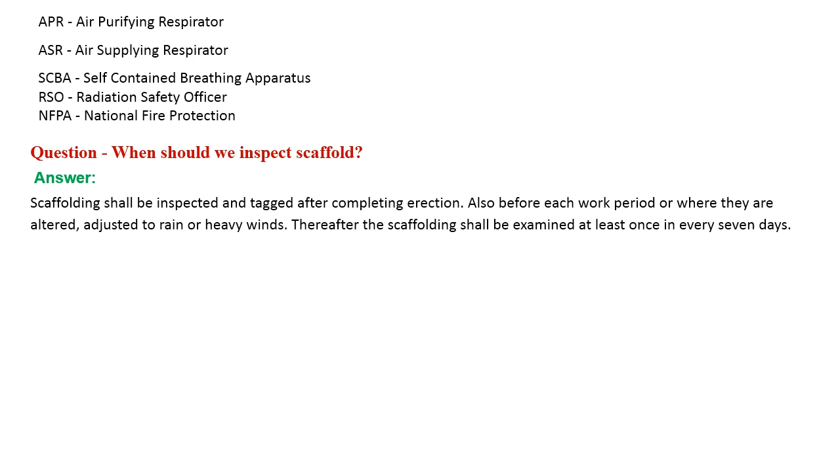When should we inspect scaffold? Scaffolding shall be inspected and tagged after completing erection, also before each work period, or where they are altered, adjusted to rain or heavy winds. Thereafter, the scaffolding shall be examined at least once in every 7 days.

What is the angle to fix the ladder? The angle is 75 degree, or 1 by 4.

What is lifeline? Lifeline is a component that consists of a flexible line that connects to an anchorage at one end and hangs vertically, or that connects to anchorage at both ends to stretch horizontally, and which serves as a method to connect components of a personal fall arrest system to the anchorage.

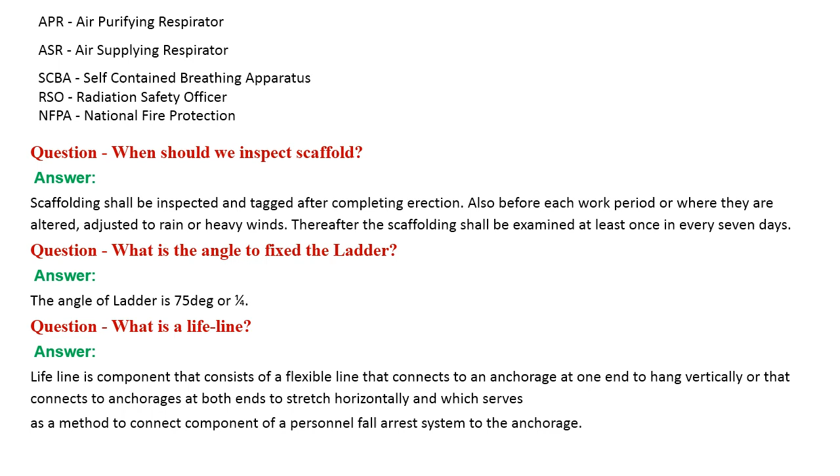What is emergency evacuation plan? A procedure to provide concise guidelines for evacuation in case of emergencies and to identify the emergencies in advance. This also helps us to plan and define roles and responsibilities of all building custodians, fire wardens and occupants.

What is the importance of toolbox meeting? The workers can be educated about safe working rules and procedures, and their awareness can be improved on some tasks.

What is a hydro test? It is the test carried out for leak testing of pipes, equipments, etc., by filling water in these equipments and pipes with some pressure, and its joints and connections are checked for any leaks or breakage.

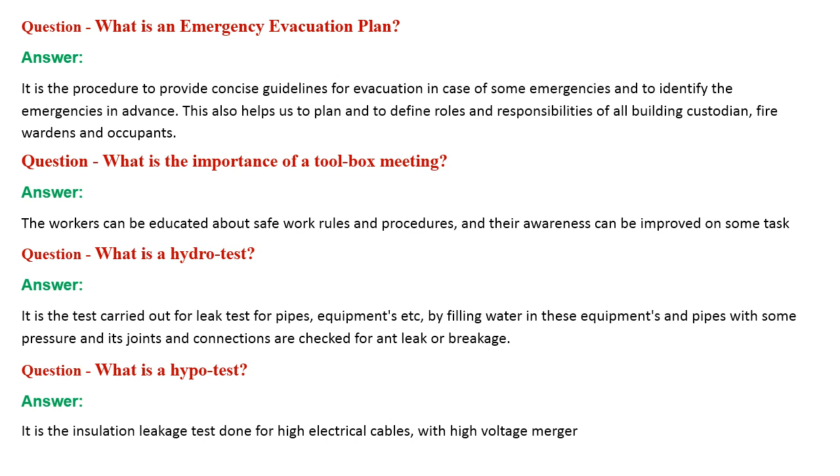What is hypo test? It is the insulation leakage test done for high voltage electrical cables with a high voltage megger.

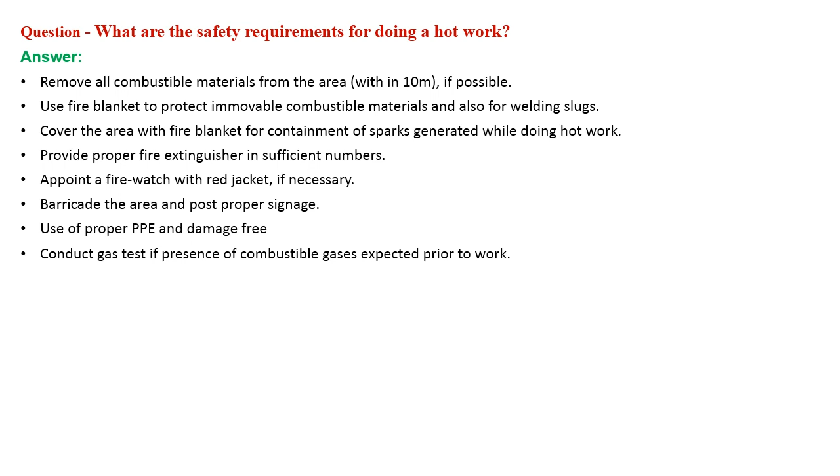What are the safety requirements for doing hot work? Remove all combustible material from the area within 10 meters if possible. Use a fire blanket to protect immovable combustible materials and also for welding slugs. Cover the area with fire blanket for containment of sparks generated while doing hot work. Provide proper fire extinguishers in sufficient numbers. Appoint a fire watch with red jacket if necessary. Barricade the area and post proper signages. Use proper PPEs, damage free. Conduct gas test if presence of combustible gas is expected prior to work.

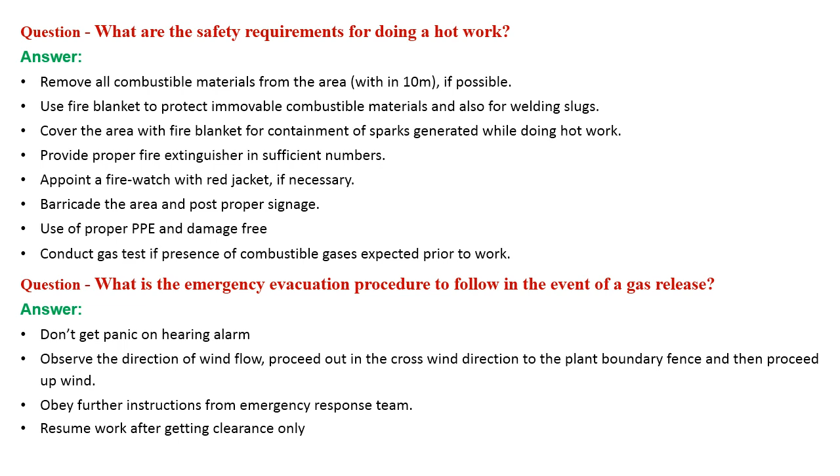What is the emergency evacuation procedure to follow in the event of a gas release? Don't get panic on hearing the alarm. Observe the direction of wind flow. Proceed out in the crosswind direction to the plant boundary fence and then proceed upwind. Obey further instructions from the emergency response team. Resume work after getting clearance only.

What are the benefits of near miss reporting? Near miss reporting helps to make analysis of the incident in order to avoid reoccurrence, to rectify the cause of those near misses before they turn into accidents, to identify the deficiencies of site safety programs or performance, and to find remedial actions to improve safety performance by reducing LTA, accidents and near misses.

What is an assembly or muster point? The area determined and marked for assembly of people working in the area in case of any emergency is called muster point. What is meant by head counting?

On hearing the emergency alarm, all people have to assemble at the assembly muster point. There, our supervisor will call his workers with the attendance sheet and confirm that nobody is trapped in the site. This procedure is called head counting. Its purpose is to ensure all workers are present in the assembly area, they are safely evacuated, and to identify the person if anybody is trapped and take necessary actions to rescue these trapped workers.

Explain me safety precautions for scaffold. Wooden board must not be painted. Cracked wooden boards should not be used. Check for rust in pipes and clamps. Clamps should be fixed and should be in good quality. Board thickness should be 3.4 cms with no bending. The construction must be rigid and properly based. Use good and sound materials. The wooden bellies should have no joints.

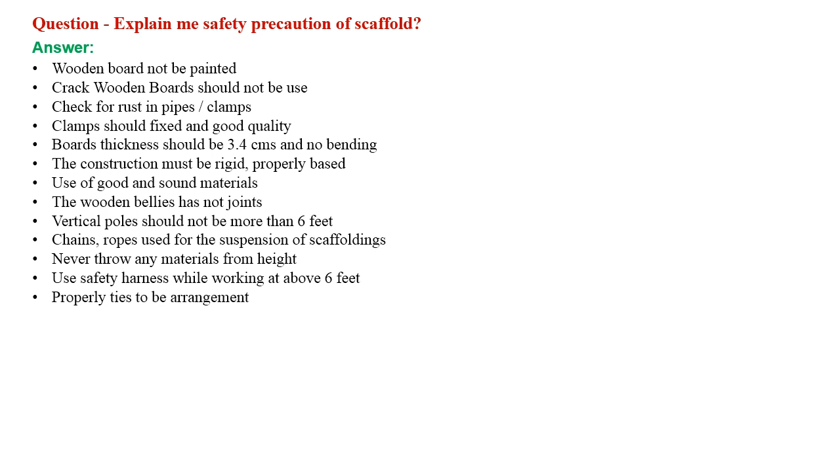Vertical poles should not be more than 6 feet. Chain ropes are used for the suspension of scaffolding. Never throw any material from height. Use safety harness while working above 6 feet. Properly ties to be arranged.

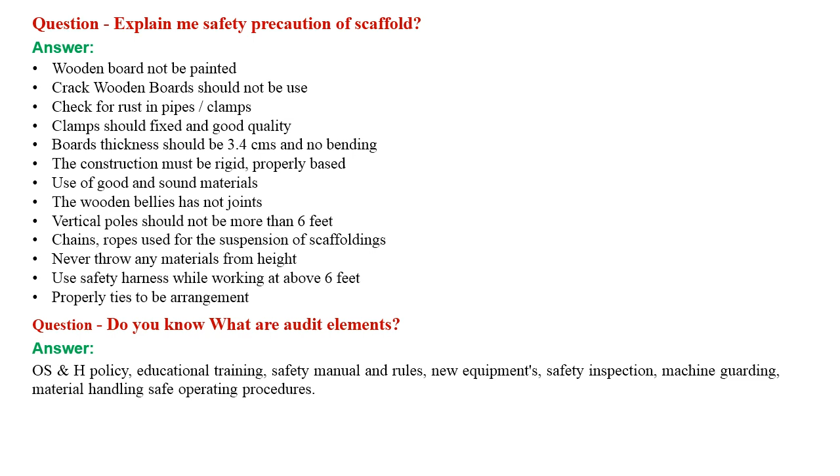Do you know what are the audit elements? OS and H policy, educational training, safety manual, rules, new equipments, safety inspections, machine guarding, material handling, safe operating procedures.

What is heat stroke? What are the different stages through which a person undergoes before he gets heat stroke? During hot days, due to dehydration, body temperature increases beyond safe limit because of breakdown of the body's heat regulating mechanism. Due to this, the person collapses, and if not taken care of, he can even die. This is called heat stroke. Generally, pulse raises 10 beats per minute for each 1 degree Celsius rise in temperature.

Heat cramps: exercising in hot weather can lead to muscle cramps because of brief imbalances in body salt. Heat exhaustion: further losing of fluid and salt can lead to dizziness and weakness, and body temperature may rise up to 102 degrees Fahrenheit. Heat stroke: in some cases, extreme heat can upset the body's thermostat, causing body temperature to rise to 105 degrees Fahrenheit or higher. Symptoms are lethargy, confusion, and unconsciousness.

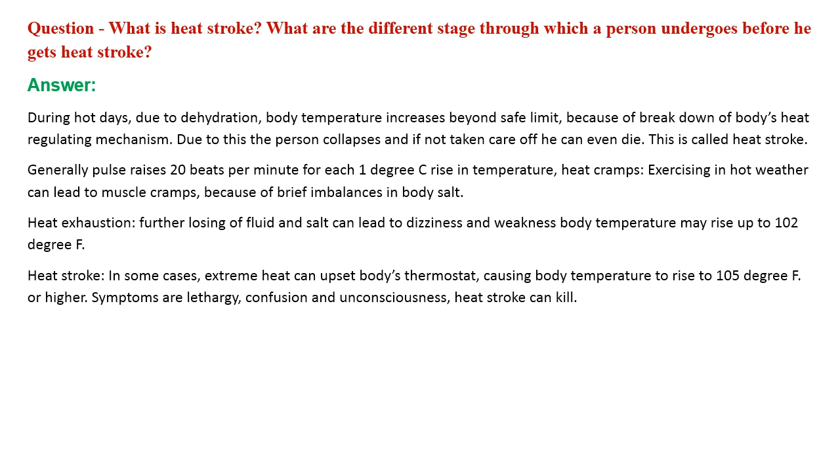Heat stroke can kill. In what circumstances does a fall protection system have to be used? If a person could fall more than 1.8 meters, then a fall protection system should be used. Example: any activity at an elevation of more than 1.8 meters such as erection, dismantling or maintenance of scaffolding, pipes, equipments, etc.

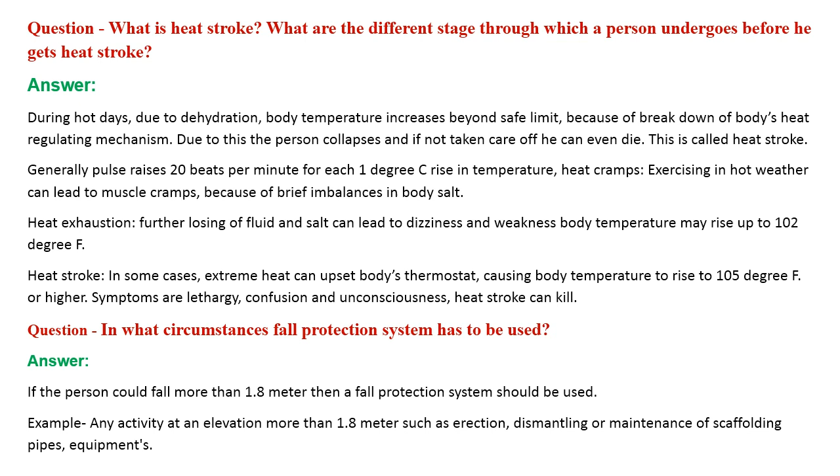Do you know what is the Factory Act? Factory Act is a social enactment to achieve social reforms and is given a liberal construction to achieve legislative intent.

Explain how many types of signboard: mandatory, information, fire and explosion, caution, wiring.

Explain me what is safety audit, and on what three bases does it operate? A safety audit is a workplace screening process that indicates any unsafe working condition and recommends corrective measures. It operates on measurement, analysis and testing.

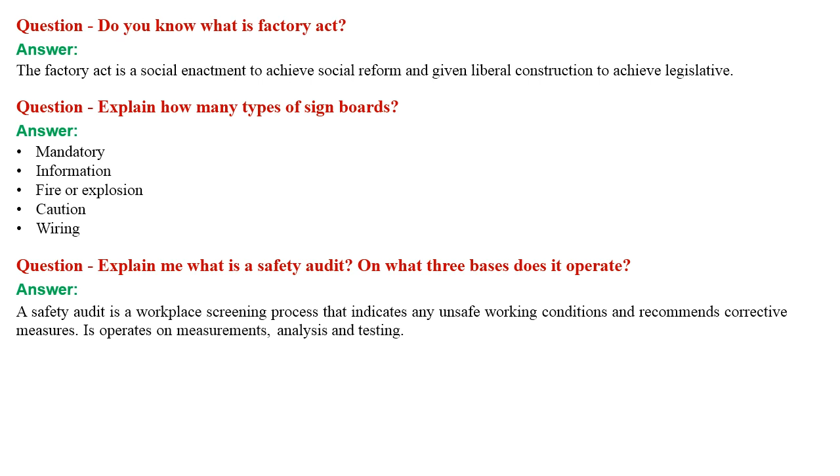Explain me: training or experience, what is more important in a safety officer's role? This is a very important question. One without the other is not potent enough for many situations, so I would consider both very important. Training is a very prerequisite, and experience comes with time. They cannot be compared or used interchangeably.

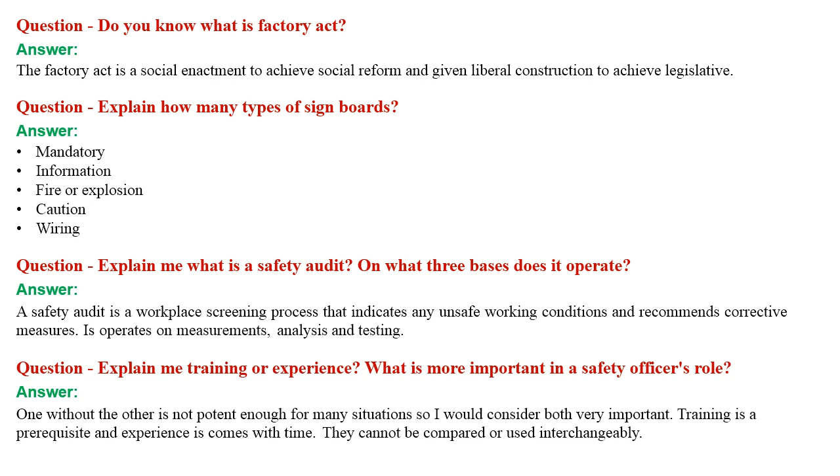Explain role of management in industrial safety. A written safety policy should be issued by management towards men, material and machines. The safety policy should bring out the management's attitude towards men, material, machine. The safety policy should be circulated to top, middle and workers. Management meetings should be in position. Management should arrange for safety inspection once in 3 months and safety audit once in a year to be carried out.

What is industrial hygiene? Industrial hygiene is defined as the art and science of preservation and improvement of the health and comfort of the workers.

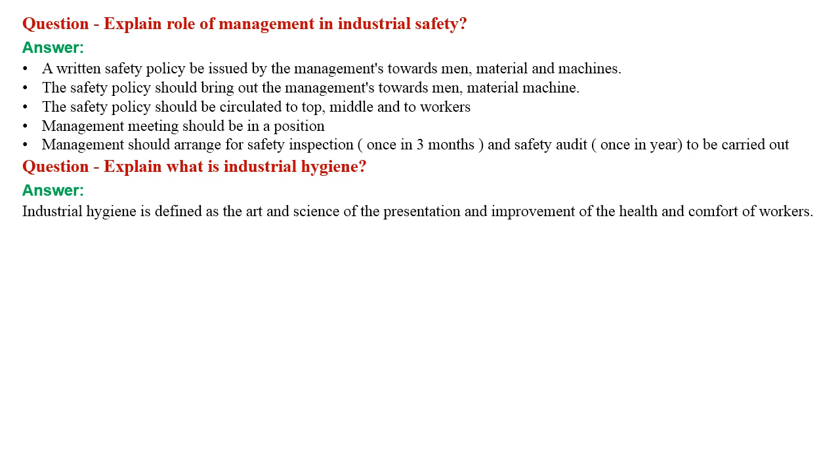Explain and differentiate between risk assessment and incident investigation. Risk assessment is conducted before an accident or incident has occurred, with the aim of avoiding any incident in the first place, while incident investigation is done after an accident has occurred to determine its causes and avoid its repetition in future.

Tell me, what are the causes of accidents with hand tools? Due to wrong way of using tools, due to defective condition of tools, due to failure of using the right tools for the right job, due to wrong way of carrying tools, due to storage of tools unsafely.

Do you know what are the precautions for gas cutting? A fire extinguisher must be available nearby. Fire watch must be available nearby. Remove all combustibles from the work area. Use all necessary PPEs. Never put welding gas cylinders inside a confined space.

Hoses shall not be laid in pathways. Gas cutting torch should have flashback arresters. Gas test to be done to check for presence of flammable gas inside. Good housekeeping and ventilation are necessary in the working area.

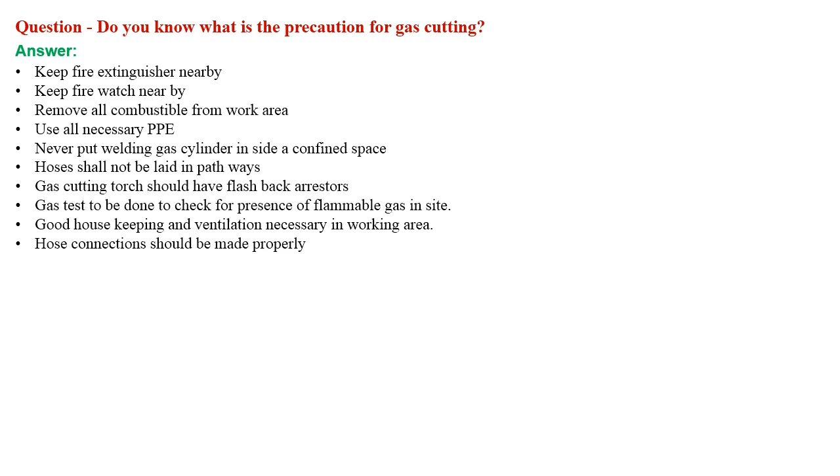Explain safety rules in using compressed air. Only authorized persons should use compressed air. The body or clothes should not be cleaned with compressed air. Compressed air hose pipes should not be placed across passageways. Leakage of compressed air should not be tested with hands. While working with tools run by compressed air, safety shoes are to be used. The tools should not be kept in position when not in use.

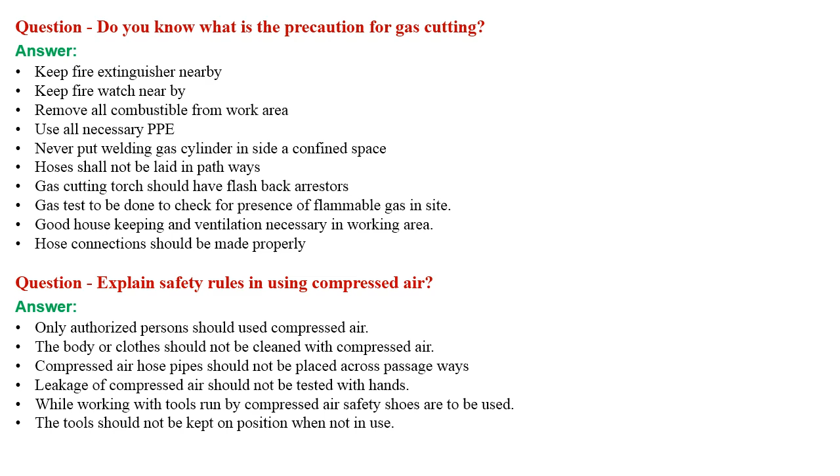Do you know the precautions for excavation? Excavation areas should be suitably barricaded. Signboards, lights, and flags should be available. Avoid heavy vehicles coming near to the sites. PPE like helmet and safety shoes should be used.

Keep the excavated soil at least 5 feet away from the excavated area. The excavated site should be sloped back to a safe angle. Hand excavation should be done in the presence of underground pipes or cable places. Cutting shall be done from top to bottom. All narrow trenches 4 feet or more deep shall be supplied with at least one ladder. While excavating on a slope whose height is over 10 feet, men should use safety belts.

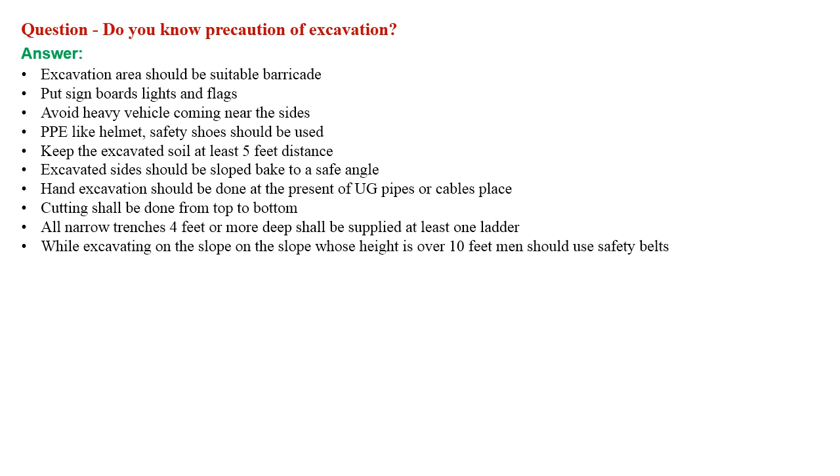Do you know about accident sequence? A personal injury occurs only as the result of an accident. An accident occurs only as the result of unsafe action or unsafe mechanical or physical condition, or both. Unsafe action or unsafe condition exists only because of fault on the part of persons. Fault of persons arises from the environment and the causes for lack of knowledge or skill or improper attitude.

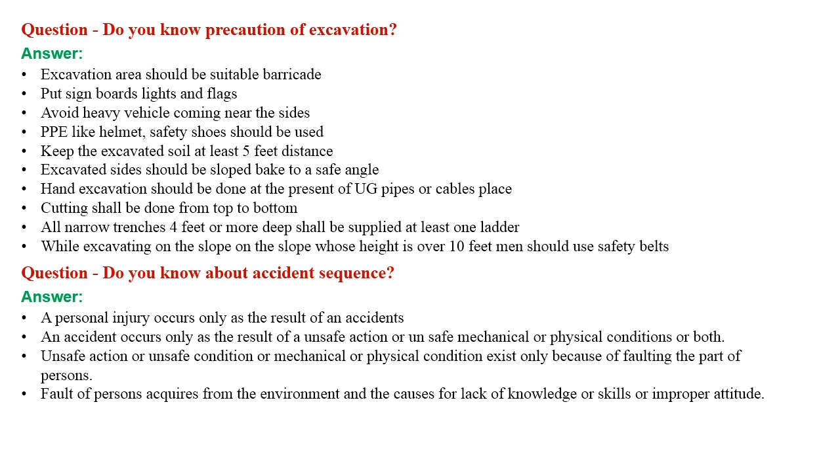Explain to me what are the causes of road accidents. Not following defensive driving techniques, not following lane discipline, overtaking on turns or from the wrong side, not obeying traffic signals, poor road conditions, or poorly maintained vehicles.

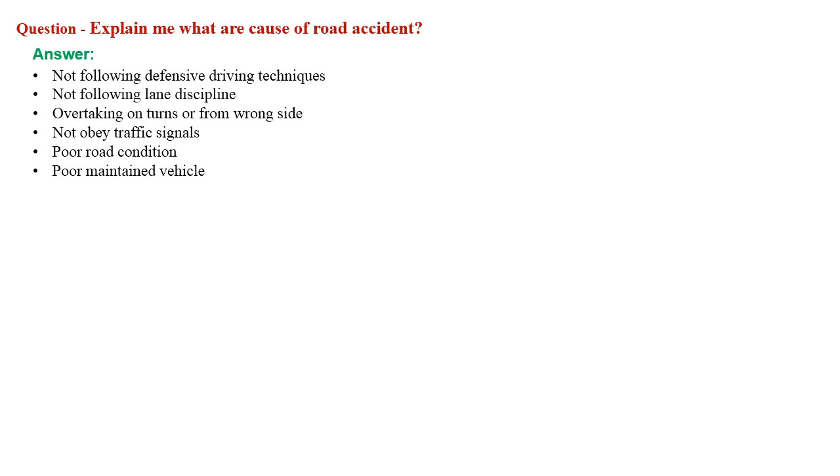Explain what are the important points to be observed for fire prevention. Good housekeeping, no smoking, use of fire resistant paint, electrical safety, fire check doors, naked flame safety, separate storage of hazardous chemicals.

Tell me what is the worst safety violation you have ever seen. This question is designed to highlight your standards. If your worst violation is something your prospective employer does every day, you may be out of luck. A better idea is to give the most egregious example you can think of, something so bad that it's highly unlikely this company is doing it on a regular basis.

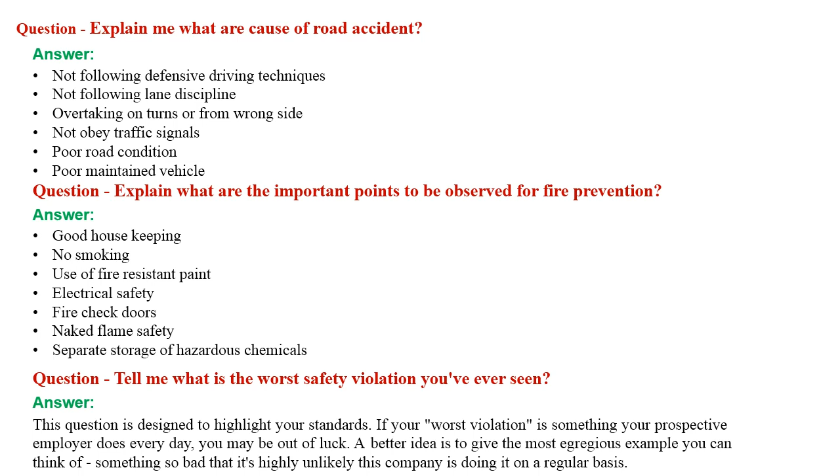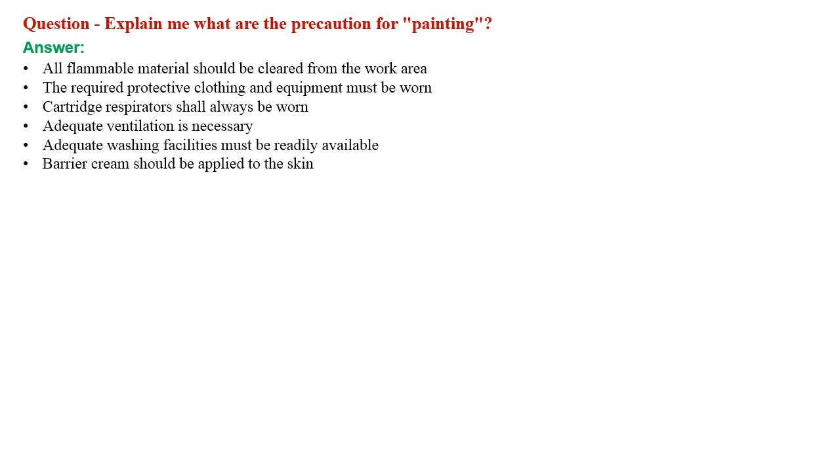Explain to me what are the safety precautions for painting. All flammable material should be cleared from the work area. All required protective clothing and equipment must be worn. Cartridge respirators shall always be worn. Adequate ventilation is necessary, and adequate washing facilities must be readily available. Barrier cream should be applied to skin.

Do you know the storage requirements for gas cylinders? Cylinders should be stored in a safe, dry, and well ventilated store, in an upright position. Standing cylinders should be secured properly to avoid falling. Flammable gas shall be stored at least 50 feet away from another building.

For example, acetylene is a highly flammable gas. Oxygen cylinders shall never be stored near a flammable gas. Empty cylinders shall be identified by marking with chalk and checked for damage before returning to suppliers. Cylinders should not be kept as supports.

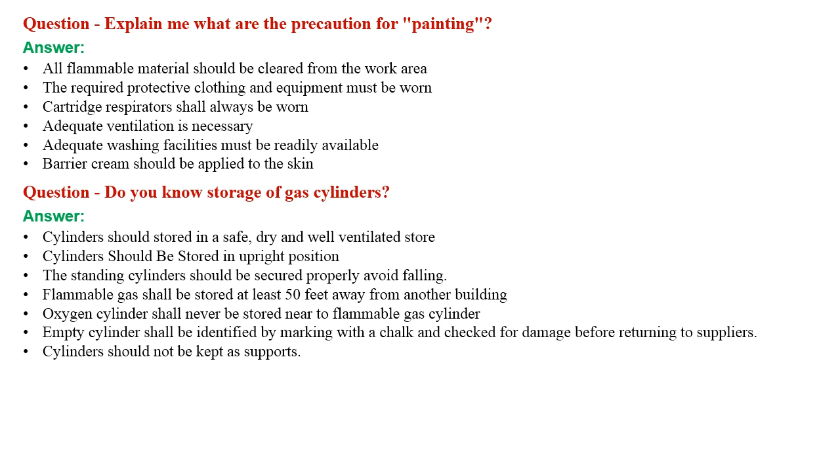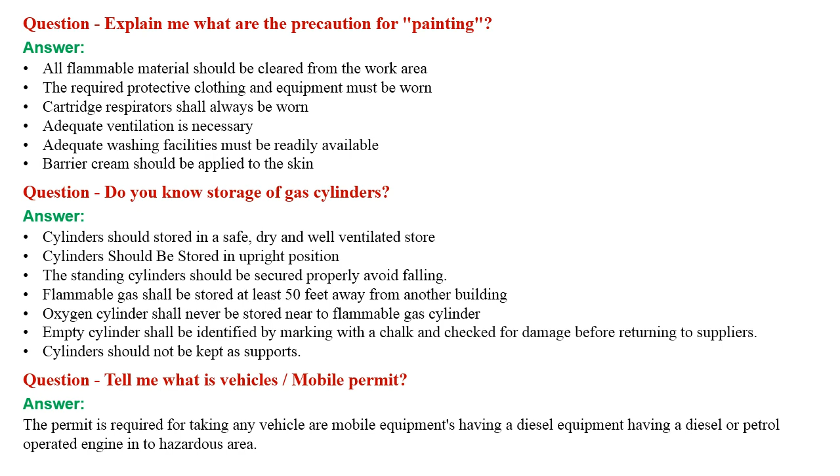Tell me what is a vehicle or mobile permit. The permit is required for taking any vehicle or mobile equipment having a diesel or petrol operated engine into a hazardous area.

Tell me some examples of unsafe conditions. Unguarded machine or equipment, poor lighting, narrow road, improper stacking, oil on floor, unsafe ventilation, unsafe or defective construction.

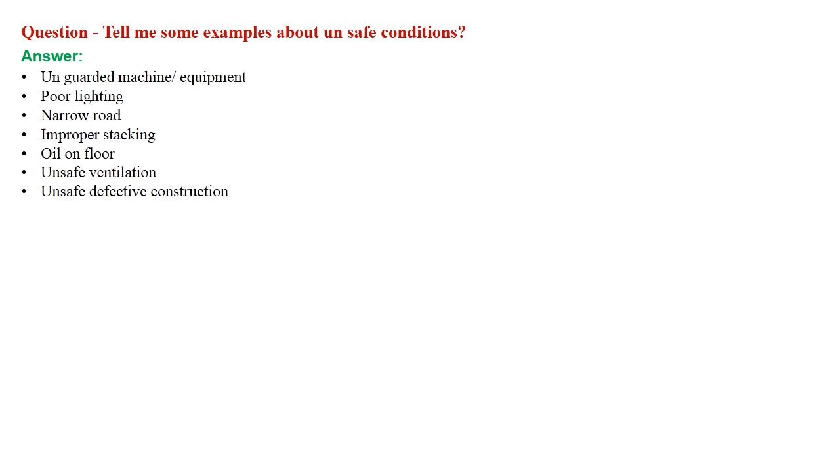Tell us what belongs to road safety. The speed limits displayed along the road should be strictly followed. Shortcuts and cutting across corners should be avoided. Nobody should try to cross the level crossing when drop gates are closed. The signal given for blocking the road - stop, look, listen, and proceed - should be followed.

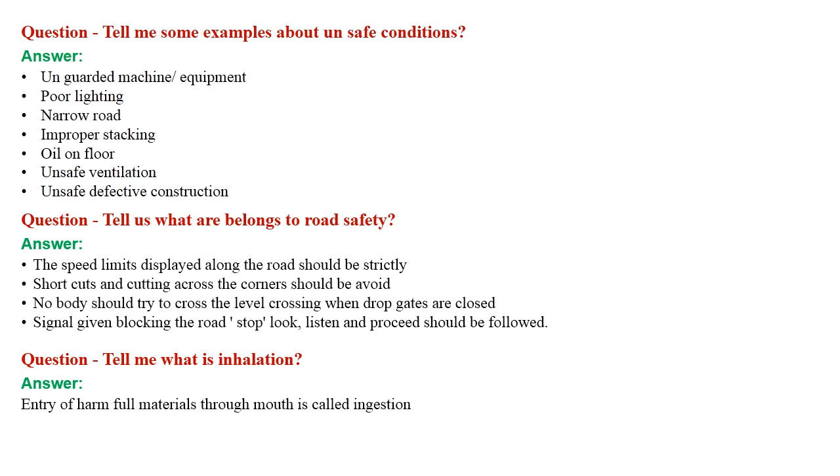Tell me, what is ingestion? Entry of harmful material through the mouth is called ingestion, or through breathing is called inhalation.

Do you know what parameters determine work at height? Any work that is required to be performed at a height of 2 meters or more above ground level is considered a work at height situation.

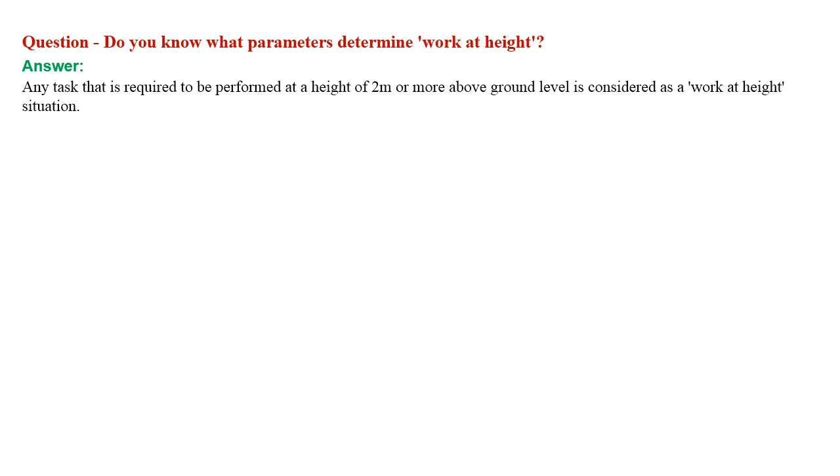Explain to me what is housekeeping. Housekeeping means not only cleanliness but also orderly arrangement of operations, tools, equipment, storage facilities, and supplies.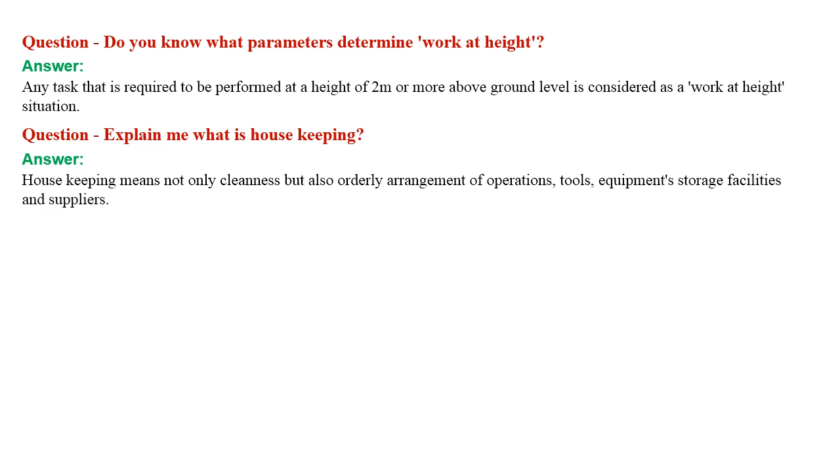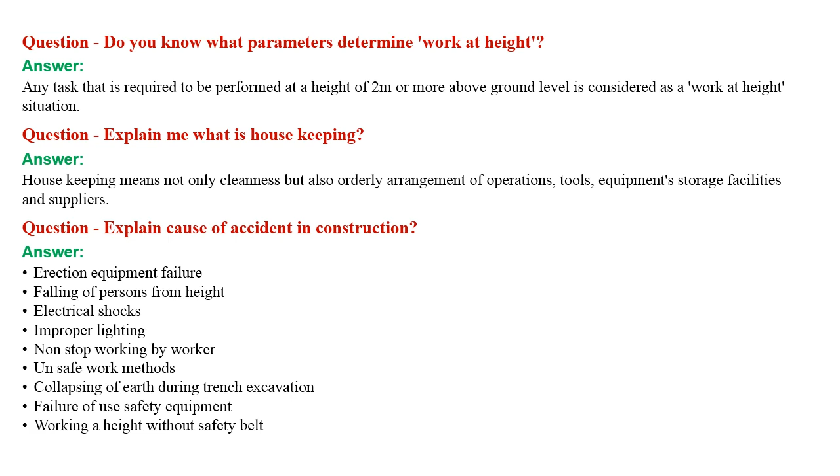Explain causes of accidents in construction. Erection equipment failure, falling of persons from height, electrical shocks, improper lighting, non-stop working by workers, unsafe working methods, collapsing of earth during trench excavation, failure to use safety equipment, working at height without a safety belt.

Tell me how to control the risk. The risk can be controlled by elimination, replacement, reduction, control, and PPE compliance.

Do you know safety in the use of hand trucks? The truck should be inspected, and the axle should be greased well. Safety shoes should be worn during work by all operators. The load should be balanced, and the weight of the load should not fall on the axle. The hand cart should not be wider than the width of the hand truck. The hand cart should be pushed and not pulled. The truck should not be placed on pathways.

Explain what is a cold work permit. It is any work which does not involve the production of spark, flame, heat, or high temperature.

Explain to me about the biggest challenge on your last job. The purpose of this question is to get some insight into your personality and into what type of thing you find difficult. If you describe something that's a common occurrence at your prospective employer, you are unlikely to get the job.

One good approach is to mention things that are likely to annoy your prospective employer too, like employees who are always trying to circumvent safety procedures.

Do you know what is risk? Probability of the realization of potential for loss or damage or injury.

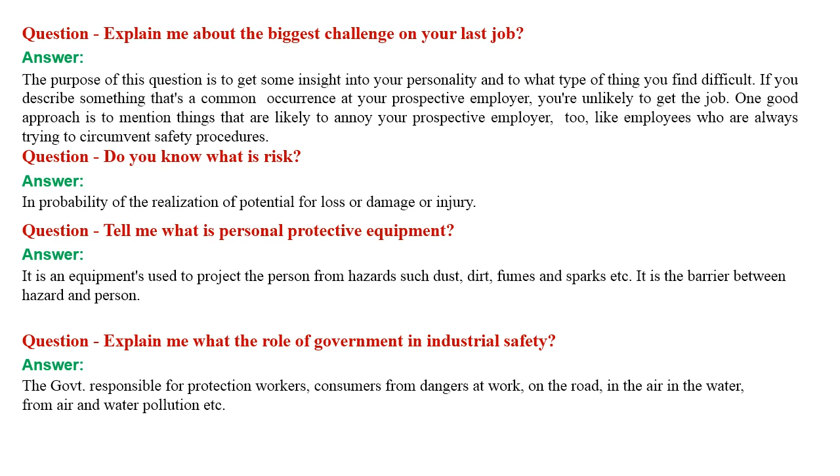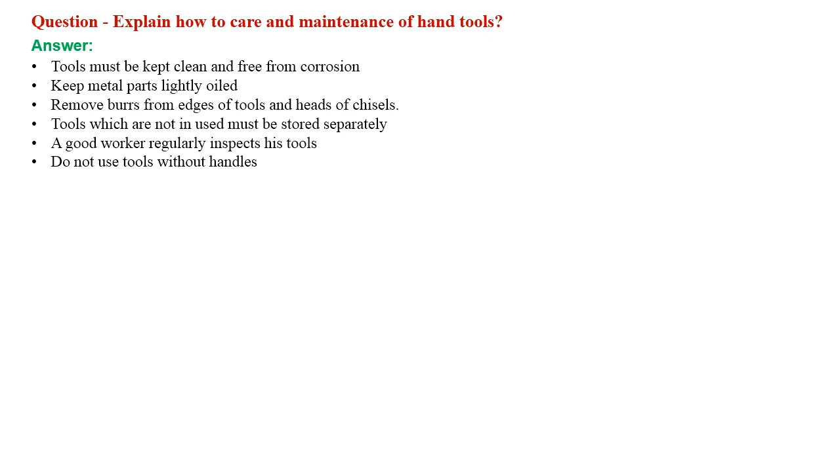Explain how to care for and maintain hand tools. Tools must be kept clean and free from corrosion. Keep metal parts lightly oiled. Remove burrs from edges of tools and heads of chisels. Tools which are not in use must be stored separately. A good worker regularly inspects his tools. Do not use tools without handles.

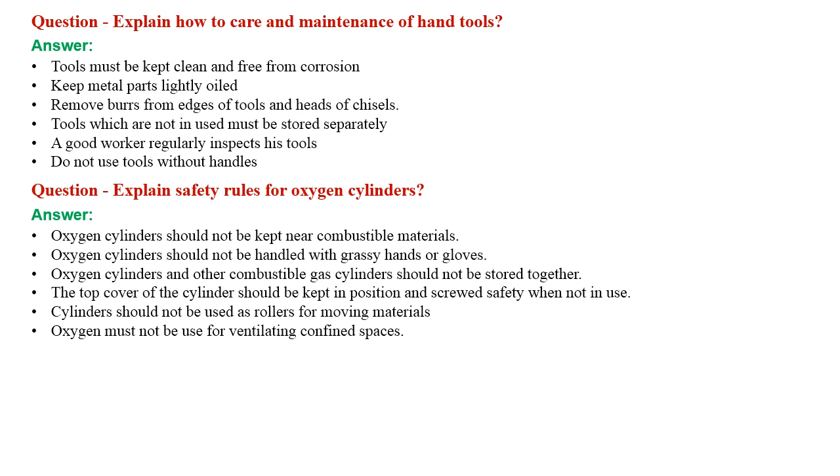Explain safety rules for oxygen cylinders. Oxygen cylinders should not be kept near combustible materials. They should not be handled with greasy hands or gloves. Oxygen cylinders and other combustible gas cylinders should not be stored together. The top cover of the cylinder should be kept in position and screwed safely when not in use. Cylinders should not be used as rollers for moving materials. Oxygen must not be used for ventilation in confined spaces.

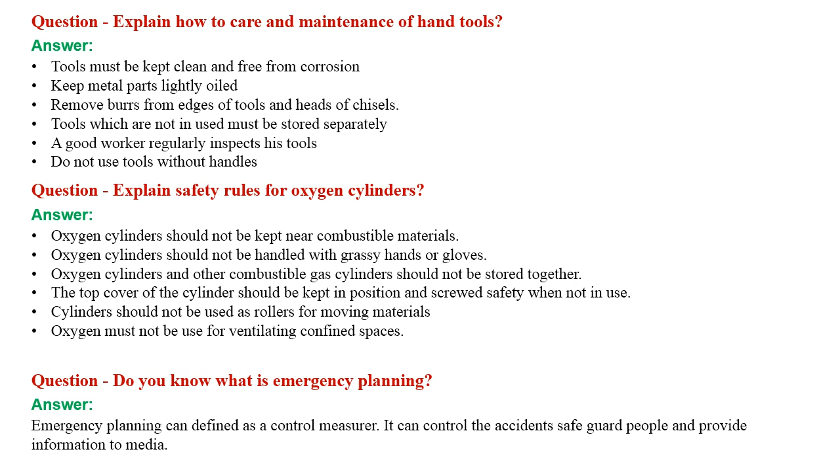Do you know what is emergency planning? Emergency planning can be defined as a control measure. It can control the accident, safeguard people, and provide information to media.

Tell me who can inspect the plant safety program. Safety officers, line management personnel, senior management personnel, first line supervisor, maintenance engineers, workers, and the safety committee. Tell me some examples of unsafe acts.

Operating any equipment without proper authority, operating at unsafe speed, failure to use PPE, using hands instead of tools and equipment, unsafe loading or placing or stacking, unsafe position or posture, unsafe working on moving equipment, wearing loose clothes while working on running machines, working at height without a safety belt.

Explain what are the duties of a factory inspector. He takes up the license and registration of factories. He also verifies the documents related to factory workers. He suggests suitable welfare measures.

Tell me what would you do if someone called and said there had been a serious accident at our facility? The point of this question is to find out whether you can balance company policy with common sense. So a good answer might go something like, well, one of the first things I would do is familiarize myself

with your procedures ahead of time so I could make sure my response is in alignment. Barring that, I would find out what type of first response was needed, both to treat the injured and resolve the situation if it was ongoing, and get that response started.

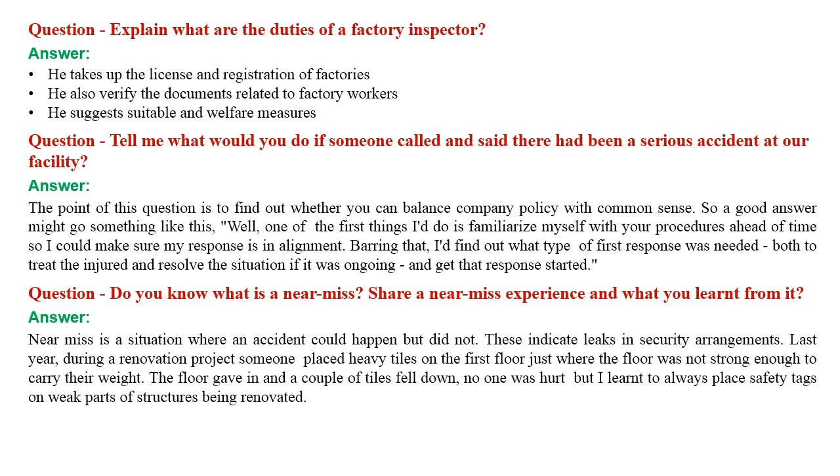Do you know what are the duties of a supervisor? He has to instruct his workers about the work method and procedures. He has to maintain discipline among the workers. He has to supply the necessary materials. He has to guide his workers in doing a job in the correct and safe way.

He has to control quality and cost of the job. He has to supply suitable personal protective equipment to his workers. He should conduct periodical safety meetings. He should conduct safety inspection of his working area. He should know about the firefighting equipment. He should know how to investigate an accident and find out the cause of the accident.

Tell me what are the advantages of good housekeeping. It helps in the reduction of accidents, including fire accidents. It saves property damages. It improves employees' morale, better productivity, and the working area becomes presentable.

Human energy is conserved. Visitors are much satisfied. The burden of the supervisor is reduced.

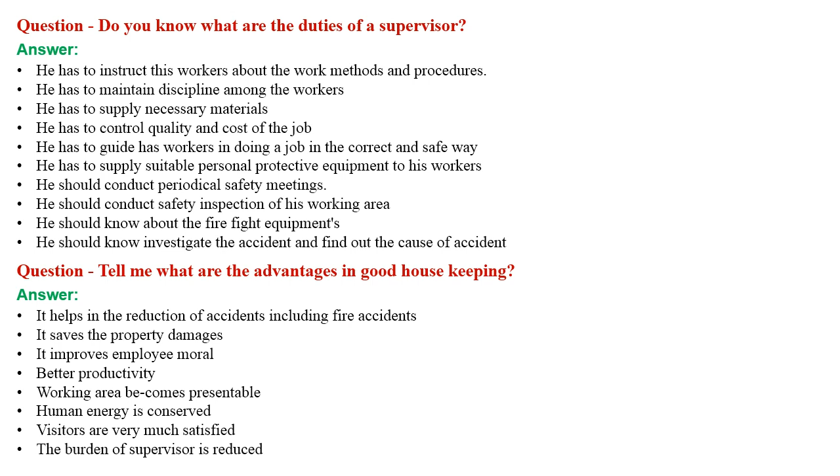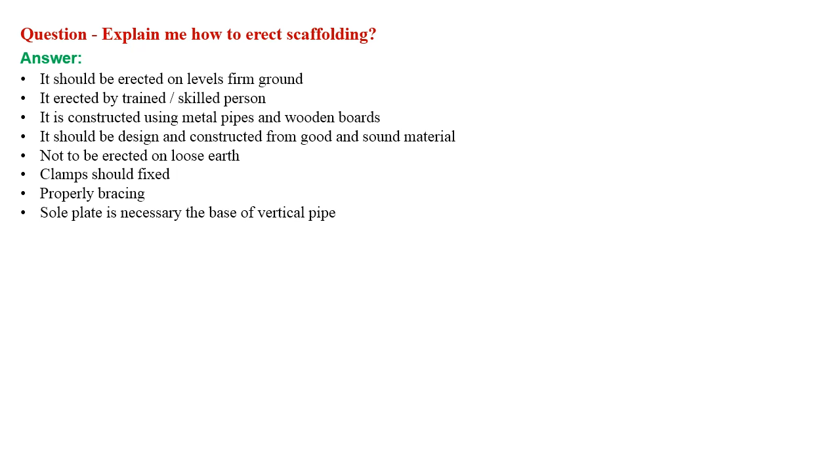It should be designed and constructed from good and sound material, not to be erected on loose earth. Clamps should be fixed, properly braced, and sole plates are necessary at the base of vertical pipes.